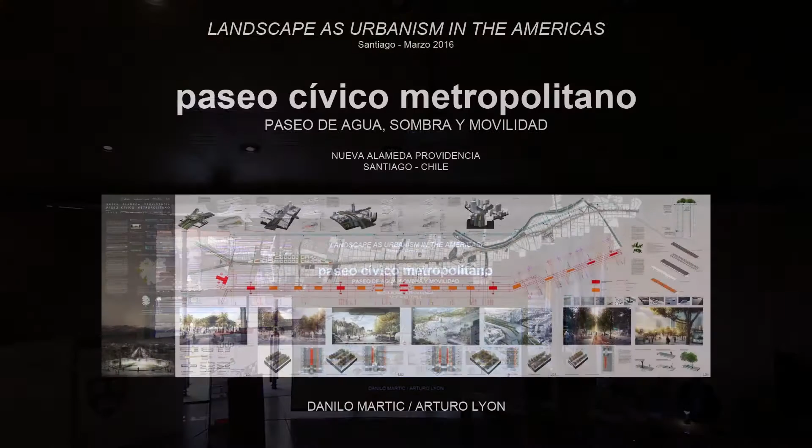This project is called Nueva Alameda Providencia, and it's the result of a public competition that was launched last year. The submission that won this competition was announced last October. It's really an interesting and important project for us for different reasons.

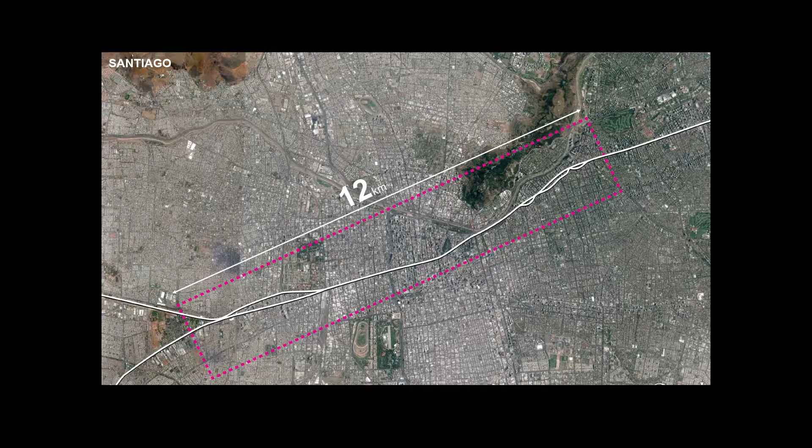The first reason is that this project is a key step in Santiago, because Santiago is a very large city with 6 million people living in it, subdivided into 34 different councils, each with an independent administration. This project is one of the first efforts launched by the regional government to develop this 12 kilometers long project that will go across 4 different councils, affecting and transforming the main street of Santiago, involving key elements of public space and the transport system of the city.

If we compare the scale of this, of the frame where the project is, it would go from Lower Manhattan up to the north of Central Park.

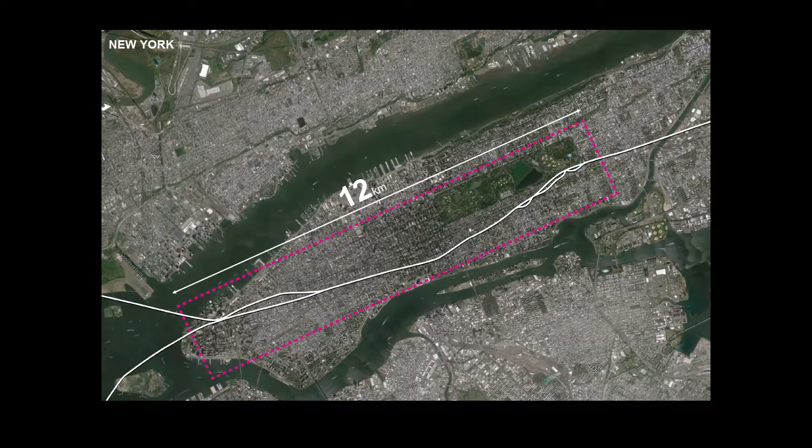This space is called Alameda in the western part, and in the eastern part it's called Providencia, concentrating many different activities. As I said before, it's really important in terms of transport. It's the main spine of the metropolitan transport system, which moves almost 3 million persons every day, and it also congregates different spaces for public manifestations, for art, and for recreation.

It has been the scenario for huge celebrations and huge protests, like the students in 2011 with great political consequences, or the winning of the Copa America, and also different spectacles of art.

Working on this area is extremely complex. So instead of trying to create a kind of design or scenography for this street, we thought it was really important to understand which systems were combined here and layered in this space. The only way to look into that was to look back, not as historians but as architects, on how these different systems have been overlapped over time and crystallized into the current situation.

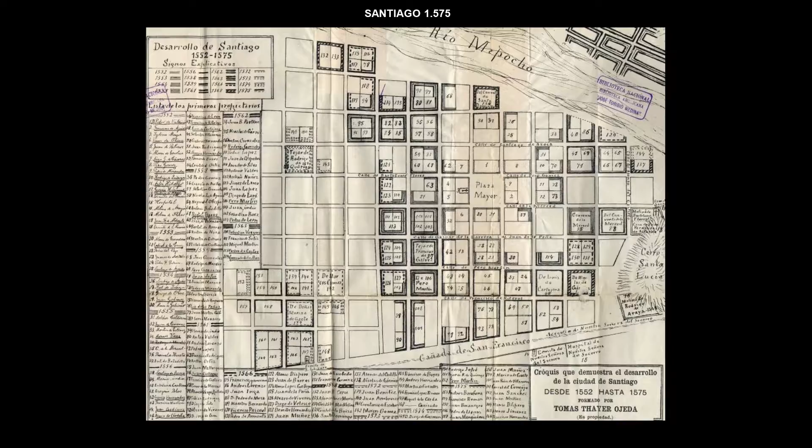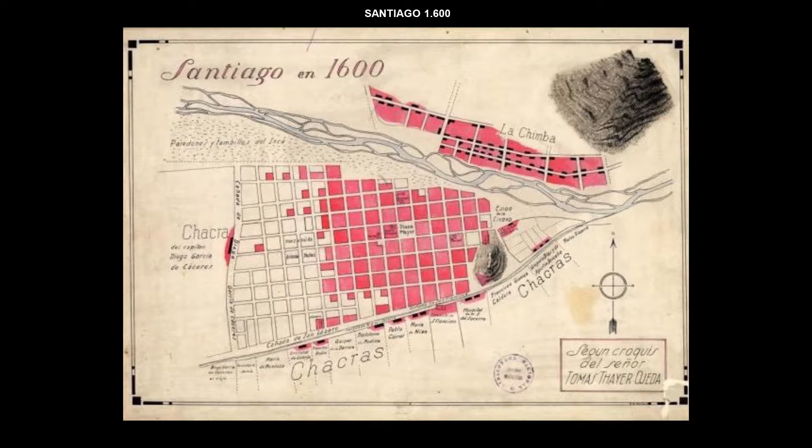First, the Spanish grid started deployed in the foundational part of Santiago until it reached the river Mapocho and the Cañada, the stream going at the lower part of the image, which was this kind of border of the city that didn't have any identity yet.

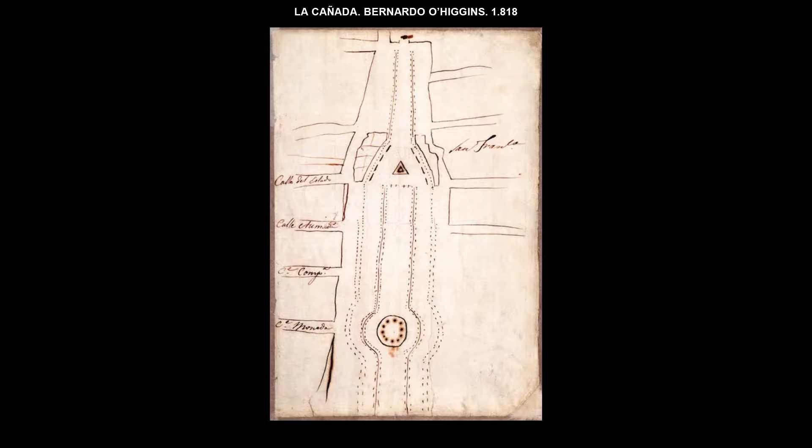At that time, Bernardo O'Higgins did this sketch with his vision for the Cañada. It's a really interesting sketch because it's almost precarious, let's say, but it combines the key elements you can still see today in the street: the trees, the water canals, and the transport streets at the sides. In the center, it creates this void for monuments and for people to go there and hang around.

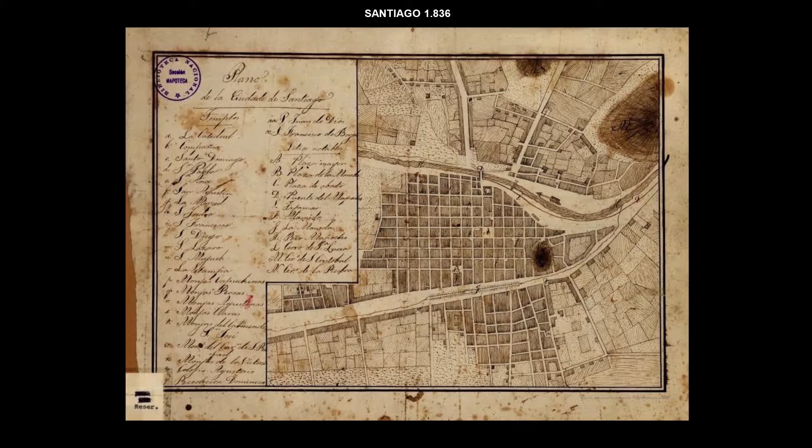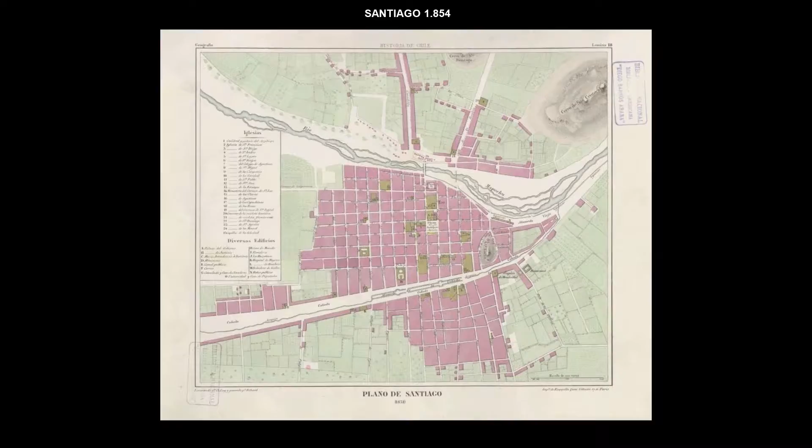This sketch becomes reality in the plans of 1836 — you see it already in Santiago's maps. Then in 1854, you see Claudio Gay's map as well, showing how it becomes an integral part of the city, creating this really magnificent public space.

You could call it a kind of multi-programmatic ground at the center of the city, which has these huge lines of trees that even hide the city behind, and it creates monuments in different spots that congregate people — in what was called by O'Higgins the Campo de Libertades Civiles.

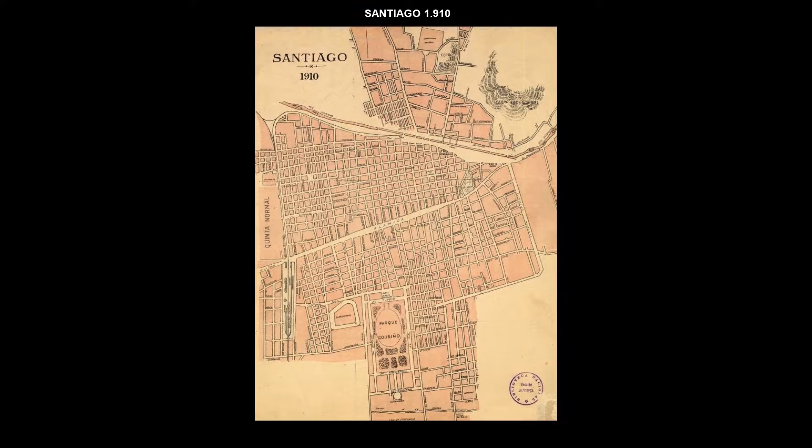Over time it starts to consolidate the different monuments, the irrigation canals, and the trees. By the beginning of the 20th century, it's already in the center of the city.

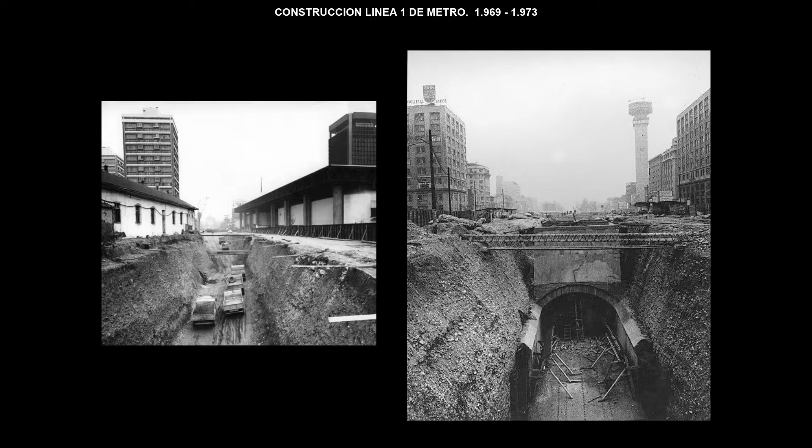Then came the construction of the metro in the 70s, done by this huge excavation. All the soil was taken out, the trees removed, and it had to be rethought for the next years.

This is one day last year. On the yellow is where the people take the transport system, and the green is where they come out, all along one day.

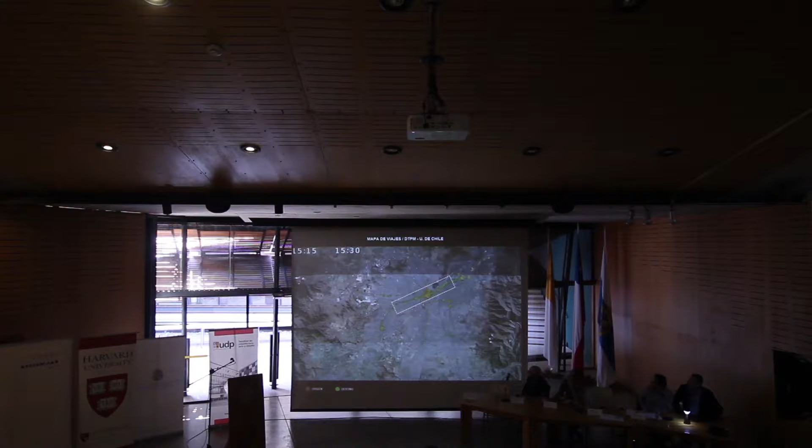In this system, any kind of small failure would create agglomerations, discontent from people, even protests. You can see this day, for example, where there was a breakdown in the metro. People cannot take the sidewalks, which are already really small. You can see all the space taken by cars, and the absolute collapse in the bus stops. It creates press attention and the questioning of all the institutions of the city.

Now the city of Santiago planned for Alameda and Providencia a new corridor for buses to be built in the next years, and this type of corridor has been done in other parts of the city. This is one of the images you get from one of those corridors. They are called BRT, Bus Rapid Transit, and you could describe it as a kind of engineering, very specific solution for transport.

But they take out all the other layers that are part of the city. It's completely against the sketch by O'Higgins, where in a very simple and precarious way he combines all the different elements. This is only with one single view on the city. This was a great step forward in calling for the competition of such a corridor, where design teams of architects, landscape architects, and transport engineers were called to give views and ideas for this corridor.

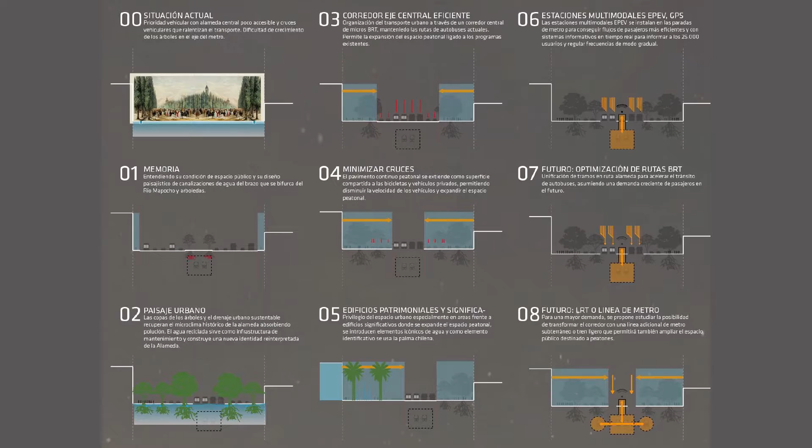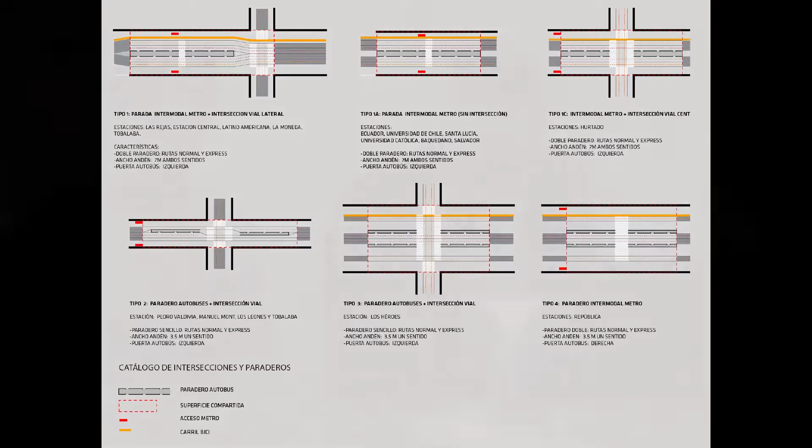The project then proposes a design capable of articulating the requirements of an efficient transportation system, which is what you're seeing here, while reconceiving the space that's fundamental for the civic life of Santiago, recovering, as I was saying, the spirit of the Alameda as conceived by O'Higgins. In this sense, the project is more about recovery in terms of history, infrastructure, architecture, and landscape in the end.

As an opportunity, we proposed a green infrastructure of 6,000 new trees, Quercus falcata, oak trees, that would complement the existing rows of Chilean palms. That's a national monument, the tree itself, which will be highlighting a series of notable places along the axis. The true project, though, in terms of green infrastructure, is the proposal to recycle a number of existing quarries dispersed throughout Santiago as tree nurseries that should be able to supply this project and hopefully others with the required amount.

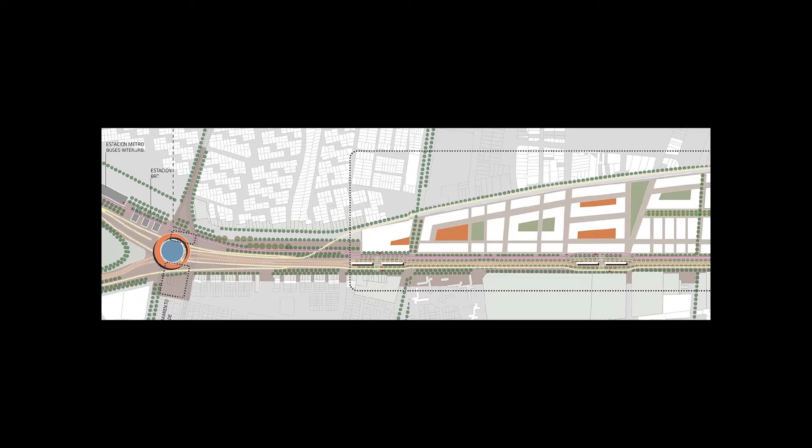In the project itself, we propose two different urban conditions or atmospheres. One of them is this kind of canopy, a covered boulevard with shadow and lots of trees for the main part of the street, and then where there are monuments or very specific parts that need a different treatment, there are no more trees. We have the palms, and some water features and fountains that open the space for the views and also refresh it with the water.

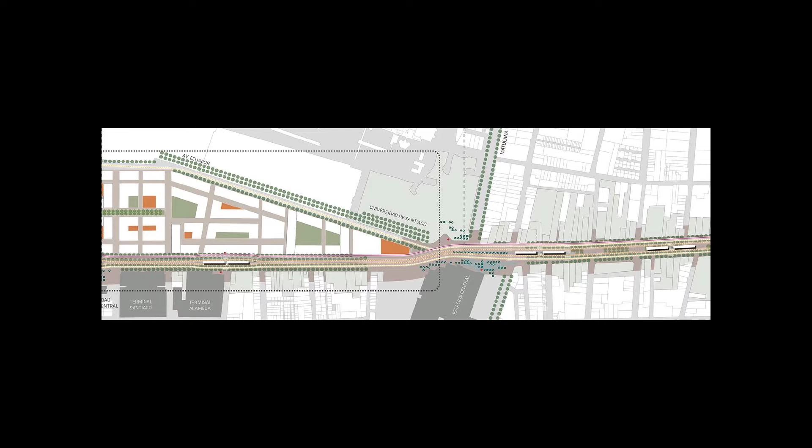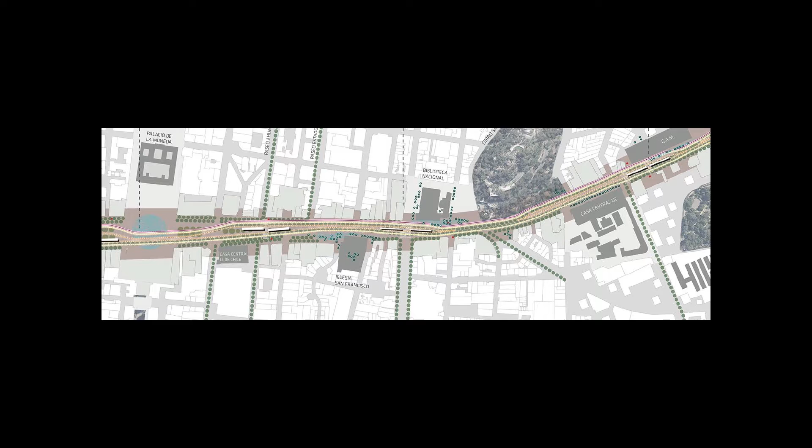Here you see, for example, the central station, one of the main train stations of Santiago, and where the old Alameda originates. As we go through, we thought in each part of the street to organize the flows according to the pre-existing trees. Here you see the Baquedano Square, where all the celebrations are developed.

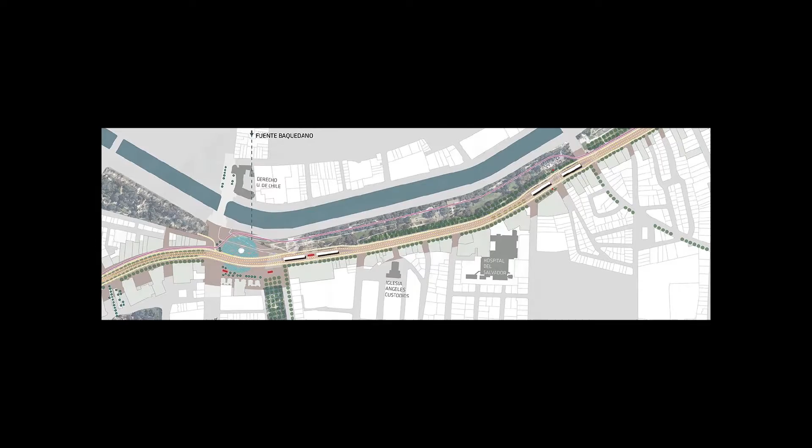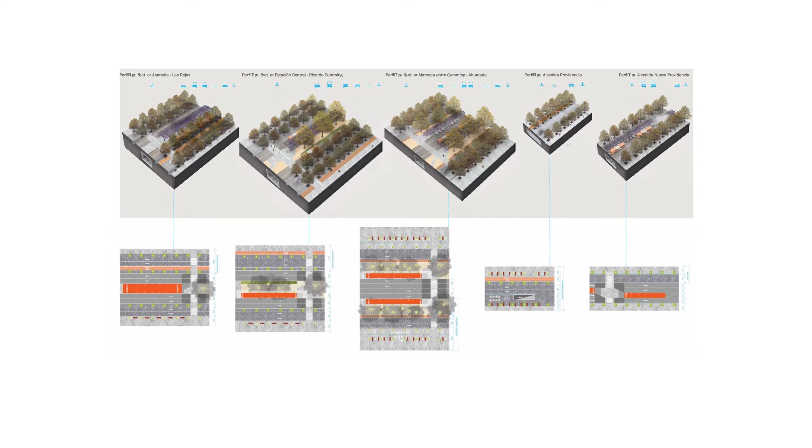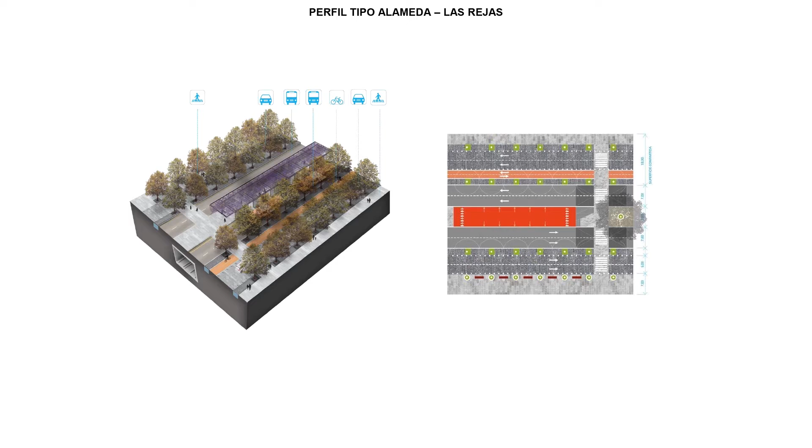The images now illustrate 4 or 5 different profiles that we designed for different parts of this axis, going from west to east. From the poorest parts of the Alameda, we have a place called Las Rejas. Here you see basically a summary of the elements we're using to structure the axis: the trees, the bus stops, which are in orange here, basically shading structures, and the ground—the different qualities and manifestations of the ground as a solid yet permeable surface.

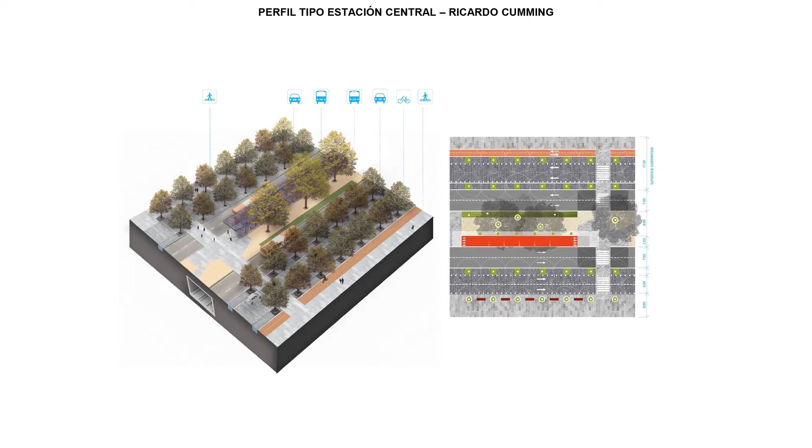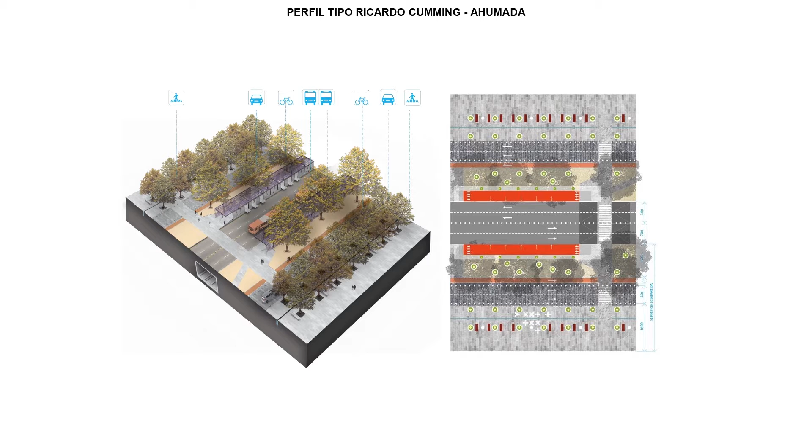What we're doing basically is moving the public transport, the buses, to the center of the Alameda, which is now vastly underused, thus opening up new space along the edges. This would allow us to expand the sidewalks and the pedestrian surface adjacent to the buildings from 1.2 meters in some areas to at least 5 meters as an average along the corridor.

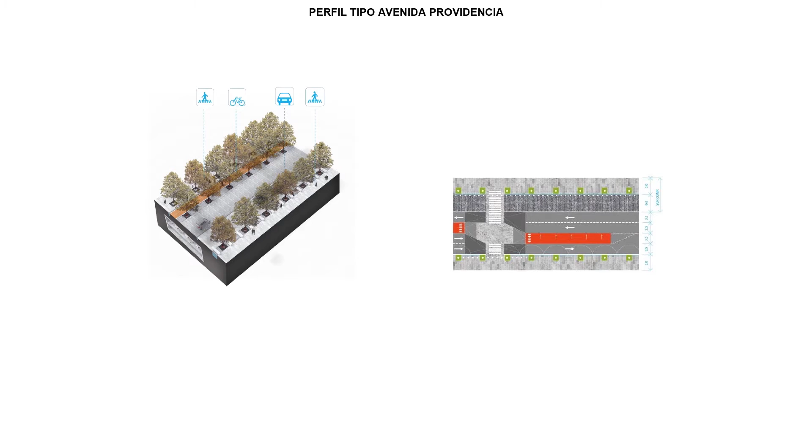We propose a number, as Arturo was saying, of structures. This would be a node in Pajaritos, which is the beginning of the project—this would be phase 1. Moving towards the west, we can see different views that we're proposing for this place. This is the bus stop, interpreted in this project as a shading structure that will blend with the landscape created by these newly planted trees.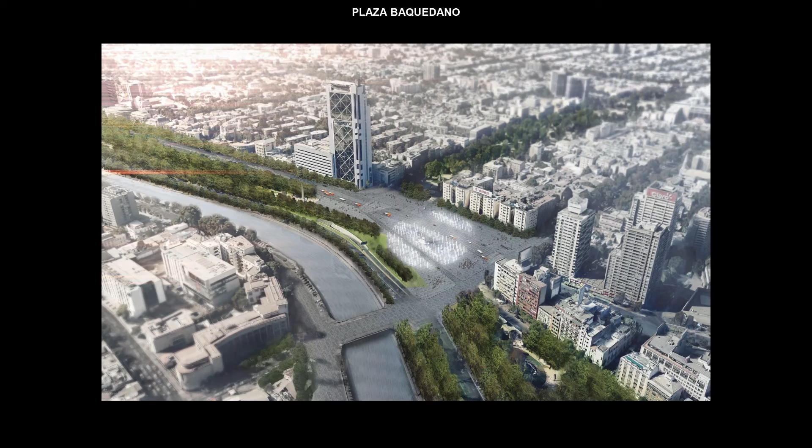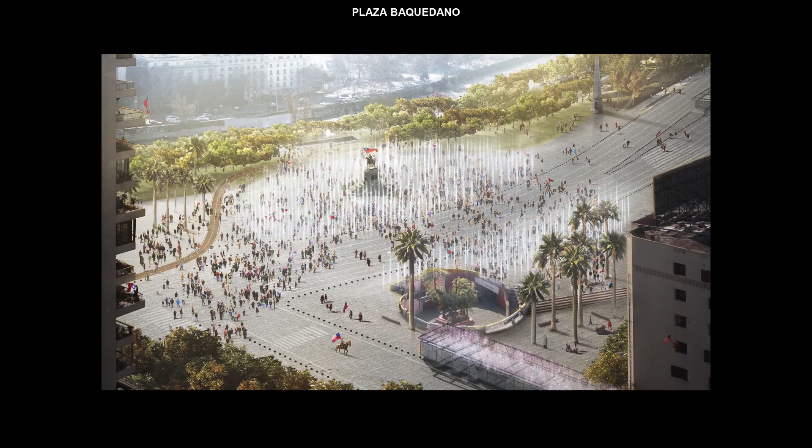Water fountains and Chilean palms in front of relevant buildings, open esplanades in Estación Central and in Baquedano, with a water feature also—a place that can hold huge amounts of people, in case there's another protest or another Copa America win.

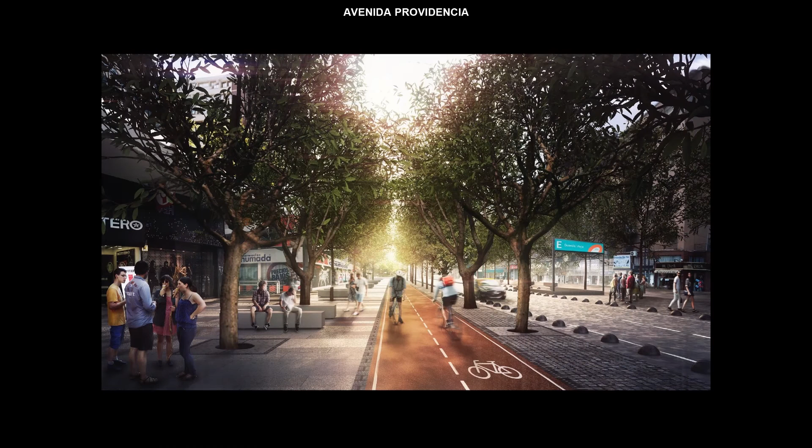The view in Providencia, where we're proposing to move the buses, taking them out of Providencia and putting them all in Nueva Providencia, in both ways, thus transforming Providencia into an almost pedestrian boulevard. And finally, Tobalaba, which would be the end of our axis.

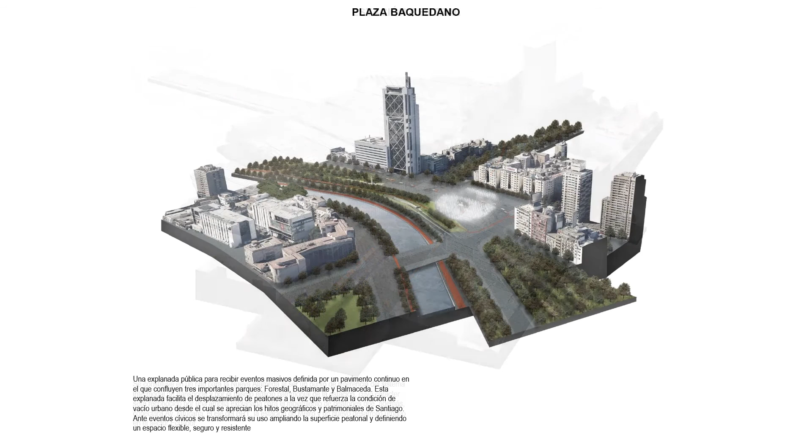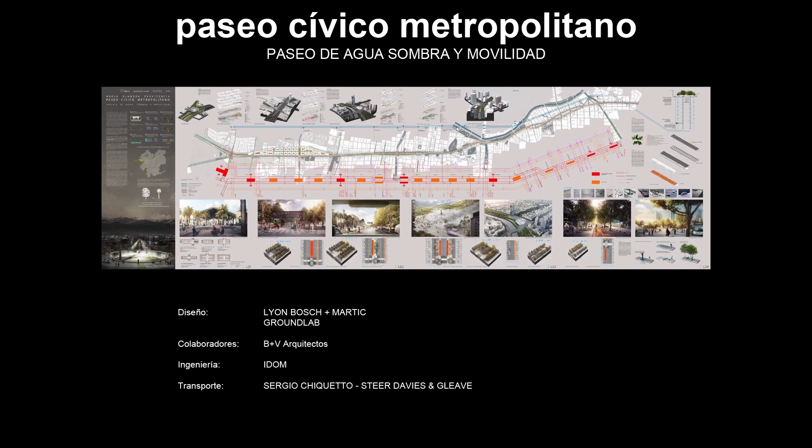This project, to close up, was developed by Danilo and Alejandra, Alejandra Bosch, and Danilo, Alfredo Ramirez and Clara Oloriz, also with the collaboration of B+V Arquitectos here in Santiago, and IDOM, who did all the engineering, with transport by Sergio Chiquetto and Steer Davies and Gleave. Thank you very much.